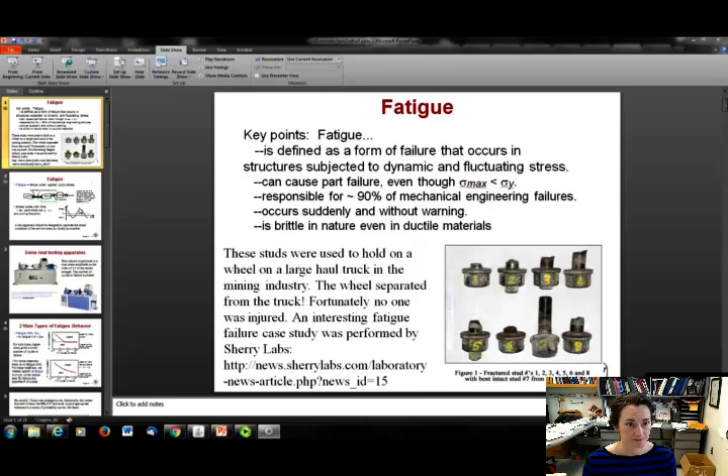Now, you can simulate fatigue. Of course, if you know that your part is going to be subjected to fatigue, you would like to test the part and see how it's going to perform in service. And so they've designed many machines, fatigue testing apparatuses that can do this for you.

So a schematic of it is shown here. Basically, you have something that flexes the part back and forth and rotates the part through so that it gets flexed in multiple directions. And then it can do that for as many cycles as you like.

Basically, what they do is they subject it to this sort of beautiful sinusoidal stress. Now, in reality, in service, the stress might not be that beautiful and sinusoidal. It might be much more erratic, but machines do the best they can to simulate that stress.

And what they do is they set this stress parameter here. You can change the mean or average stress, and you can change the stress amplitude. You can change the frequency of the oscillations of the stress, and then you just run it to failure. You wait until the part breaks, and you do that for multiple scenarios on the same type of material so that you can get a feel for how that part will perform under a cyclic applied stress.

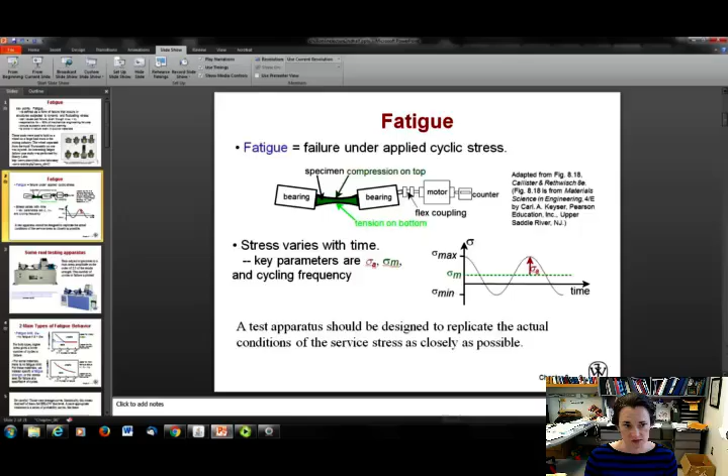Of course, you want to replicate the actual conditions of service as closely as possible. Here's some images of some testing apparatus that I found online. Basically, the tests will subject a specimen to a stress amplitude that's on the order of two-thirds of the tensile strength, and then what you do is plot the number of cycles to failure versus the stress.

So here's a couple images of those plots. Here, what's plotted in this case is the stress amplitude. You could change it to the mean stress. You could plot whatever parameter you're interested in regarding the stress on the y-axis. And then on the x-axis, you plot n, which is the number of cycles to failure. This is a logarithmic plot with cycles to failure here.

There's basically two types of fatigue behavior that are seen commonly. One type of fatigue behavior is seen for many different steels—that's the one up here at top with this curve. And then on the bottom curve, you see that for a lot of non-ferrous alloys, and we'll talk about those two scenarios.

For these two different scenarios, higher stress is actually going to give a lower number of cycles to failure. That's why the curve goes up as it approaches low numbers, with your stress amplitude. So the part will fail at a lower number of cycles if you subject it to a higher stress.

Not really surprising. Now, with some steels, as long as you keep the stress below what's termed a safe level, the part won't fail on you. So you have to keep it at a low stress. You're in this safe region because the curve will flatten out as it approaches high numbers of cycles. As long as you keep it below that stress amplitude, the part will perform well. That's a steel type behavior.

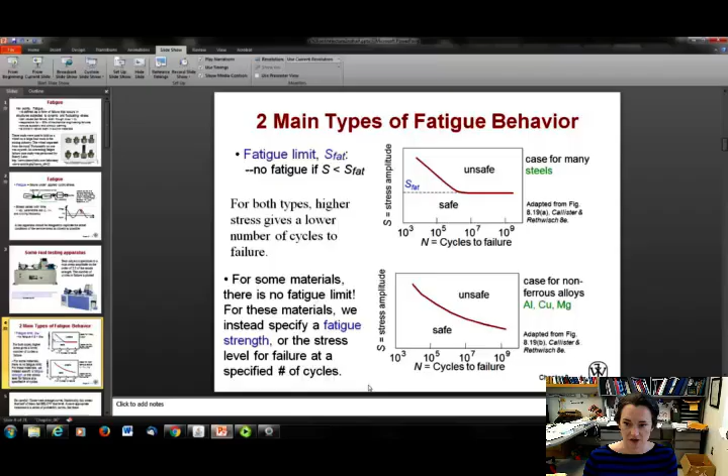Now you have to be really careful because those curves I showed were actually average curves. Statistically, that means half of them are going to fail below that level. If that's your mean curve, then half of them are going to fail below that.

A more appropriate treatment might be a series of probability curves. If you go on and become a materials engineer, a materials scientist, I would hope you would do this sort of thing and plot a parameter, then stay in the safe limit even for the low probabilities of failure.

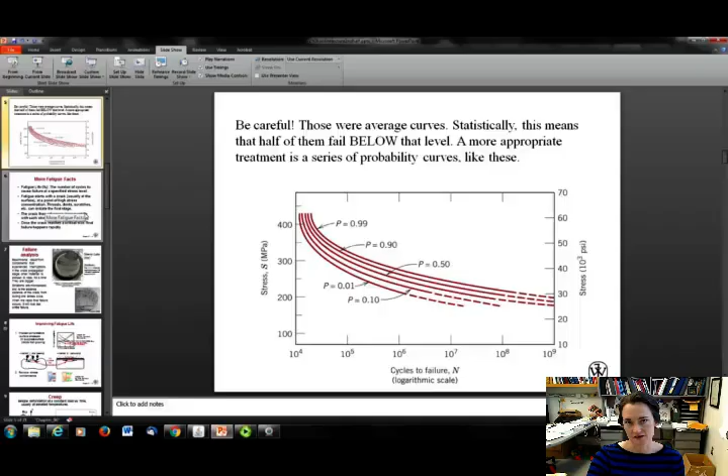Now, another important parameter that sometimes gets cited is the fatigue life. The fatigue life is the number of cycles to cause failure at a specified stress level. So you specify the stress level, and then you see how long it is until the person has to change that part out, basically.

Fatigue, when it starts, happens in 3 stages. It usually starts off with a crack or a scratch or something like that. So you have a defect in your surface. It could be the threading on your bolt, a dent in your surface, a scratch, a rusted spot, whatever. Then at that defect, a crack will form, and this usually happens at the surface.

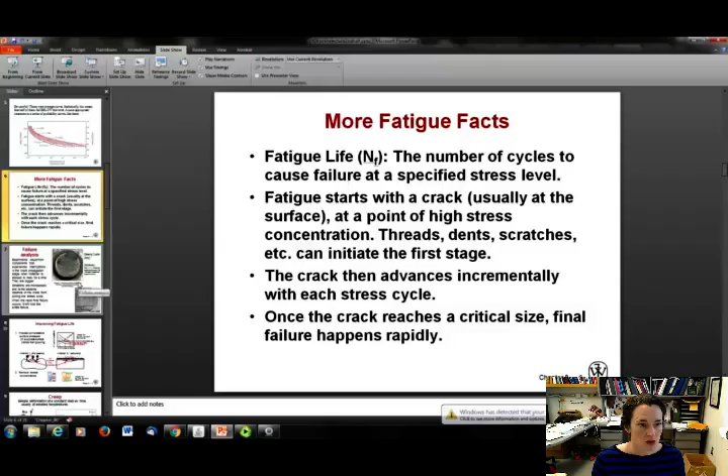In the second stage, that crack that's formed will advance incrementally with each stress cycle. Every stress cycle, the crack will move a little further, and a little further. When it's reached a certain critical size, the final failure will happen. That's why we say fatigue failure happens without warning, because if you don't know the crack is there, all of a sudden the part will just fail one day and you've got what looks like a brittle fracture failure.

Now, there are people that do these analyses, like the example we showed earlier, and you can look at the fracture surface and see what's going on. There are certain characteristic things they see in these fatigue parts. First, this is an image of one of those bolts that failed that we showed on the very first slide. It's exhibiting something called a beach mark, also sometimes called growth rings or clamshells. It shows this kind of characteristic layering look, like a tree ring or growth ring.

What happens is the crack is advancing while being subjected to stress, but then the part is taken out of service for some time. Maybe everybody goes home for the night, or maybe the part is on a bridge and there's not too many cars on the bridge that late at night. So it's allowed to relax a little bit, then subjected to the stress again, relax, subjected, relax, and this forms a very distinct looking pattern that people have learned to recognize as a sign of fatigue failure.

They're bigger, visible to the naked eye or with just a simple handheld lens. Now if you look at the part under an electron microscope or a high power microscope, you can see what are known as striations inside these beach marks. The striations are microscopic, and they show the advance of the crack front during just one stress cycle, looking like little ripples.

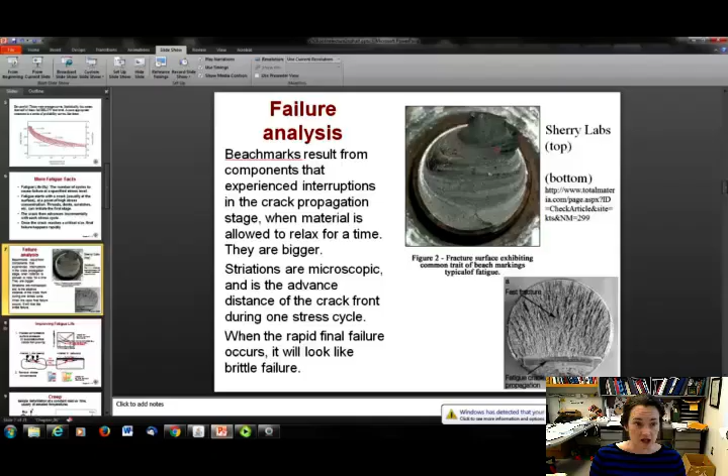Now, since most of these defects, the cracks, start at the surface, anything that you can do to strengthen the surface is a good thing. So you can do what's called shot peening, which introduces defects at the surface, hardening, strain hardening. You can carburize it, you can alloy it. Alloying will strengthen a part. And you can also remove those stress concentrators.

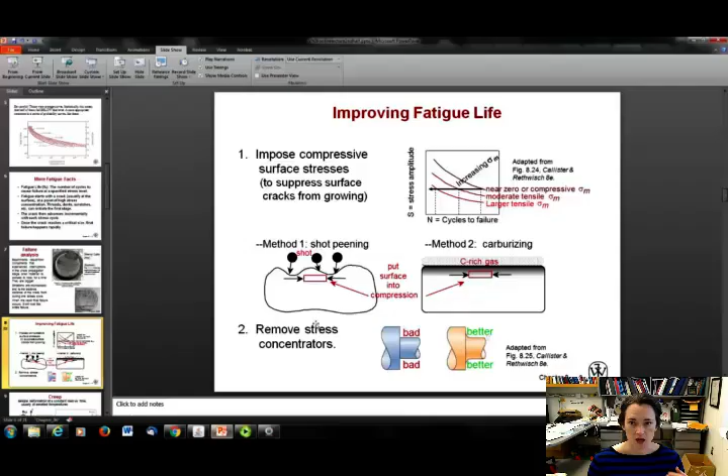If you have very small radii of curvature, very sharp corners, or anything like that on your part, then your fatigue will want to set in there. So anything that you can do to make the radius of curvature larger would be good. That's also a good thing to think about.

Okay, so that's fatigue and fatigue life. Now let's talk about creep. There's some parts that aren't necessarily subjected to cyclic loads with a stress that varies in time, but there may be a load-bearing type thing. They're supposed to hold a long tensile stress for a long time, and it's not cyclic in nature, just really heavy all the time, for example. Those parts are subjected to creep.

Oftentimes these parts, say for example if it's in a jet engine or something like that, this also happens at elevated temperatures. The part gets really hot in service. So if you have kind of a constant load over time at an elevated temperature, your part is subjected to creep. Okay, so there's 3 stages of creep.

First of all, when you first place the part in service, the very first few days, this is called primary creep. In that, you have an instantaneous deformation. The part will deform the instant that you put it in service by some amount. It'll get all stretched out. And then the slope here will decrease with time until it reaches the steady state, which is the secondary part.

They believe that this decrease in the slope with time of the strain on the part, which is called the creep strain, is due to strain hardening. So the part, the metal, is actually getting tougher in service. Then it reaches a plateau where the strain hardening is actually battling with the recovery phase for the part, because remember the part is being subjected to heat. And then you have what looks pretty much like a flat, straight slope there. That stage is called secondary creep.

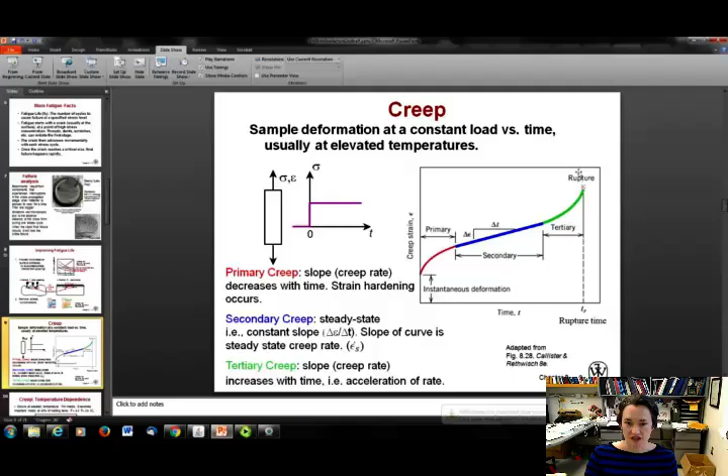And then finally, it exits the secondary creep and enters the tertiary creep phase, and then the slope actually increases with time until the part finally ruptures. So you want to stay away from that.

Creep, as you can imagine, has a temperature dependence. The hotter your part, the more your creep strain rate will be. The faster the creep will occur. For metals, it becomes important mostly at greater than 40% of the melting temperature. Then it really takes off. So that's something to bear in mind.

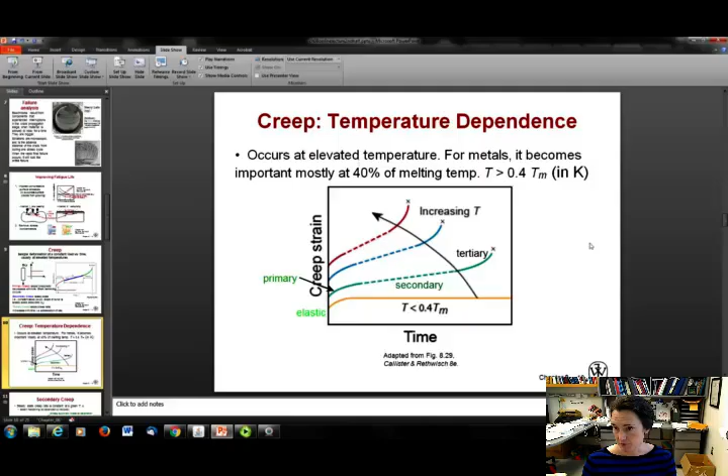Okay, so let's talk more about that secondary creep regime. Your steady state creep rate is actually constant at a given temperature and stress. You're at that point where the strain hardening is balanced by recovery and you've got that constant looking slope. Given a temperature, your exponential dependence of temperature is here, so you have the activation energy for the creep, and as long as that temperature is held constant, this exponential term here is constant. It's e to the minus q over RT, and that's the activation energy for the creep, that q, and then there's your temperature.

Now, your strain rate is the strain, which remember is the change in length over the length.

So that's the definition of strain. And a strain rate is how much strain happens per unit time. So that's your strain rate, epsilon dot.

Then you have a material constant in here, which is going to be a bit different depending on what your material is. And then you have your applied stress raised to the power of n, your stress exponent. Now if you do a log plot of these things, they look like straight lines.

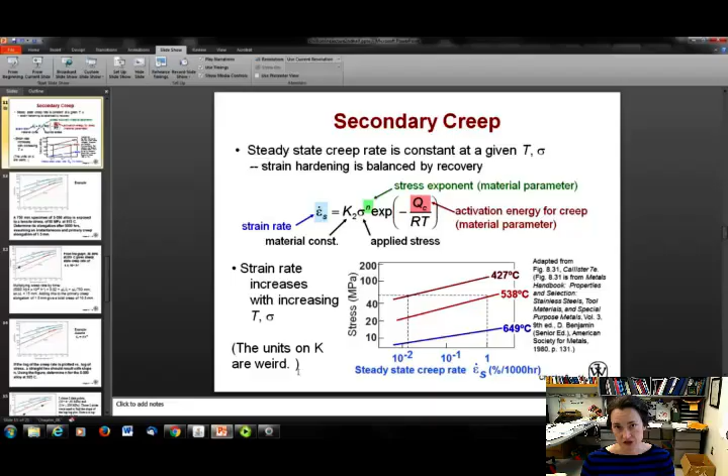So your strain rate increases with increasing temperature and increasing stress. Don't worry too much about the units on K, they're really strange, but it's basically just a fit parameter that you would get from the fit for a particular material.

Okay, so let me do an example problem for you so that you can see what some of these creep problems look like. I actually have about 3 examples here to go through.

So this is a steel alloy, S590 alloy, and it's 750 millimeters long initially, and it's exposed to a tensile stress of 80 megapascals at 815 degrees Celsius. Using these plots, we're going to determine the elongation after 5,000 hours, assuming that the instantaneous and primary creep elongation is 1.5 millimeters.

So these curves here show the secondary creep behavior, and the instantaneous and primary creep elongation are given to you as 1.5 millimeters. So you just need to figure out the secondary part and add it onto the primary.

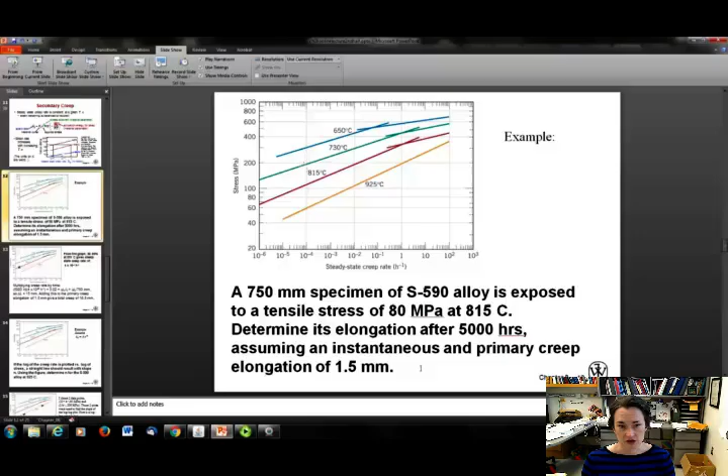So what we can do is we know that the part was subjected to 80 megapascals at 815 C. So I can look at my plot here and read off for 80 megapascals from the 815 C curve, which is that red curve here, and see what the creep rate is at that value.

So reading that off the plot, I get 4 times 10 to the minus 6 inverse hours. Again, the units are a little strange on these things, just go with it. So here's my steady state creep rate.

That's my epsilon dot. And then what I can do is it asks me for 5,000 hours, so I can multiply my creep rate by my time. So I have 5,000 times 4 times 10 to the minus 6, and I get 0.02. So that's my creep.

So that'll give me my creep. If I multiply my creep rate by my time, I get my creep. And that's equal to, remember, the strain, which is the change in length over the initial length of 750 millimeters. So that means I can solve for my elongation, and it's 15 millimeters.

And that's for my secondary stage. If I add that to the primary creep, I get 16.5 millimeters of elongation of that part. Hopefully that helps.

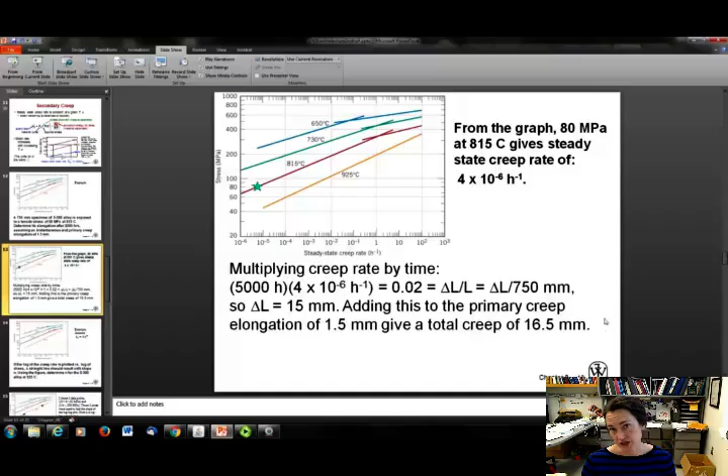Okay, here's another question, all right? These are all taken from your book. If the log of the creep rate is plotted versus the log of the stress, as it was previously, a straight line should result with a slope of n.

So using the figure, determine n for the S590 alloy at 925 degrees Celsius, shown here in the orange curve. We're assuming that the temperature is held constant, so that exponential term e to the minus q over RT is a constant value.

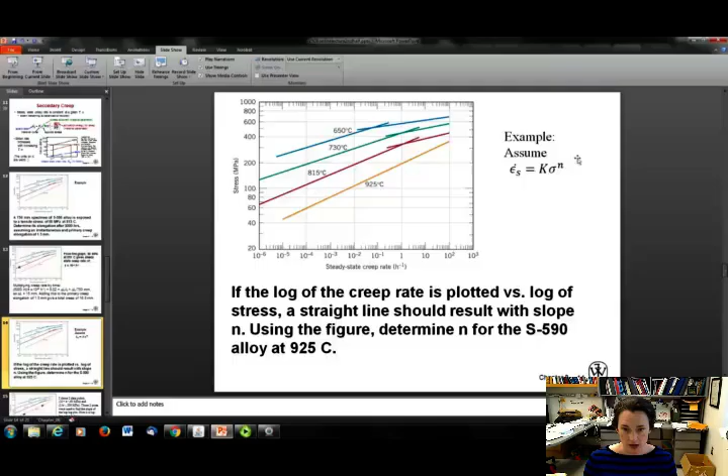So for this curve, it's just shown here, and it's some value. And we're assuming here that epsilon dot is equal to k sigma to the n. So what I'm going to do is choose 2 data points off this line and figure out my slope, and from that I can figure out what my value of n is.

So the 2 data points that I chose are the ones that kind of crossed over one of these grid lines, two cross grid lines here. And the two data points I chose were 10 to the minus 4 and 60 megapascals - it looked like it intersected there - and 1 inverse hour and 200 megapascals. So I chose those two data points.

Now if you look at what the log-log plot would be, if I take the log of both sides of this equation, I get log of my creep rate equals log of k plus n log sigma. And then what's plotted here, though, is the stress on the y-axis. So my slope then would not be n, it would be 1 over n.

I rearranged my equation here to show that. So I have 1 over n log of my creep rate minus 1 over n log of k. This just becomes my intercept, so it's unimportant to me for my slope calculation. And then that's equal to the log of sigma.

So if I want to solve for just my slope, that'll give me my value of 1 over n. I plug in for my two data points: my change in y would be log of 200 minus log of 60, and the change in x would be log of 1 minus log of 10 to the minus 4. If it's log base 10, the log of 1 is just 0, and the log of 10 to the minus 4 is minus 4. When I do that, I get 0.1046, which equals 1 over n. Solving for n, I get 9.6, so basically 10.

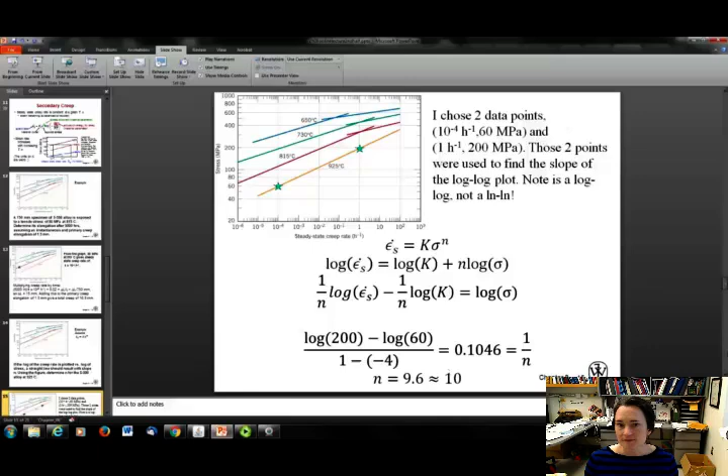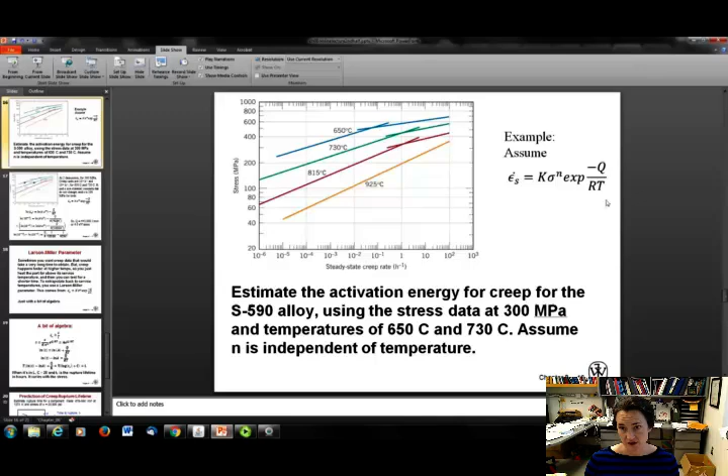Next question: estimate the activation energy for creep for the S590 alloy using the stress data at 300 megapascals and temperatures of 650 C and 730 C. Assume N is independent of temperature. So in my example here, I've got my equation for my creep rate: epsilon dot equals K sigma to the N, e to the minus Q over RT. That's my assumption.

Again, I'm going to use my two data points, here for the 300 megapascal data. Looking at the intersection of the data, I get creep rates of 10 to the minus 4 inverse hours and 10 to the minus 2 inverse hours for 650 and 730 C, which were the temperatures cited. Now K and N are material constants that don't change, since all these curves are for the same material, the S590 alloy, so those can be assumed to be the same. And sigma is given as 300 megapascals for both.

So from this I've got basically two equations and two unknowns. I know my values of creep rate, I know my values of temperature. I don't know the K sigma to the N bits, but since I have two equations, I can subtract them and that constant drops out. So I end up with the natural log of 10 to the minus 4 minus the natural log of 10 to the minus 2 equals Q over R times 1 over 1003 minus 1 over 923. I solve this equation and get my Q, plugging in the known gas constant R, 8.314 joules per mole Kelvin.

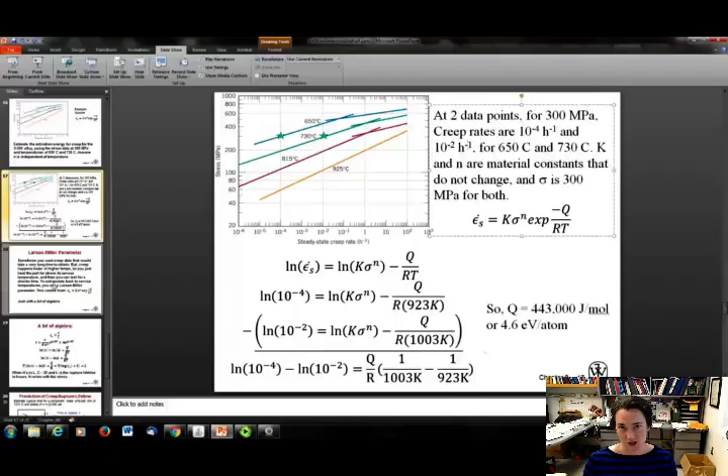Now sometimes you want creep data, but it would take a really long time to obtain because the expected life of the part is years, for example. But you know creep happens faster at higher temperatures. So if you want a test that takes a reasonable amount of time, you heat the part up to a temperature far above its service temperature, and then extrapolate back for the temperatures it would actually encounter in service to figure it out that way. So you do the test at a higher temperature and figure out what would happen at a normal temperature. We can use what are called Larson-Miller parameters and Larson-Miller plots to figure this out.

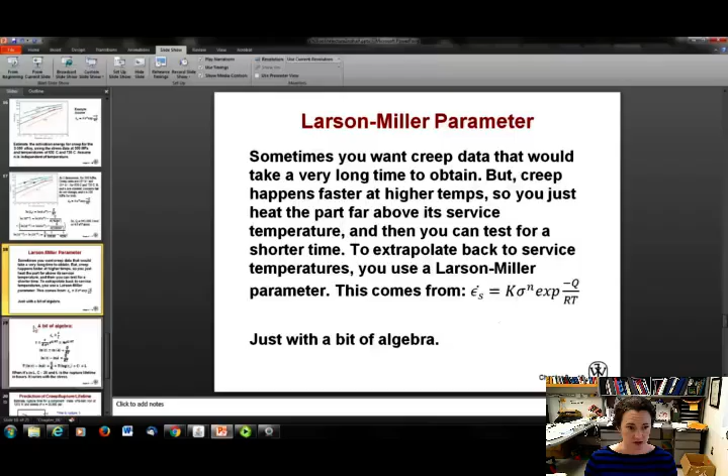Your Larson-Miller parameter just comes from the same equation we've been using: creep rate equals K sigma to the N, e to the minus Q over RT, and you apply a bit of algebra to it. If you remember that your creep rate is just your creep strain over time t, you can rewrite the equation so that time equals your strain over K, over sigma to the n, times e to the Q over RT. Basically I flipped the equation and multiplied and divided through by my strain. Now I'm taking all this stuff out front because I don't care too much about it - I'm just going to call it 'a' for some constant.

And then I take the natural log of both sides, and I get log of natural log of t equals natural log of a plus q over rt. Move things over to the other side, subtract it off, multiply through by my temperature, and then I get this relationship: my temperature times the natural log of my time minus the natural log of my constant. Now this is equal to q over r.

Now we can switch this over to a log-base-10 plot so that it more closely matches your book. All that would do is introduce a proportionality constant that we don't care too much about, and maybe change what this constant is here inside. That's all that would do. And then that is our Larson-Miller parameter L.

So our Larson-Miller parameter L is the temperature times the log of the time to rupture plus some constant C. Your book says this constant C varies a bit, but it's about 20. I'm sure if you went through and did the math, you could figure out why it's about 20. The rupture lifetime is usually cited in hours, and it varies with the stress.

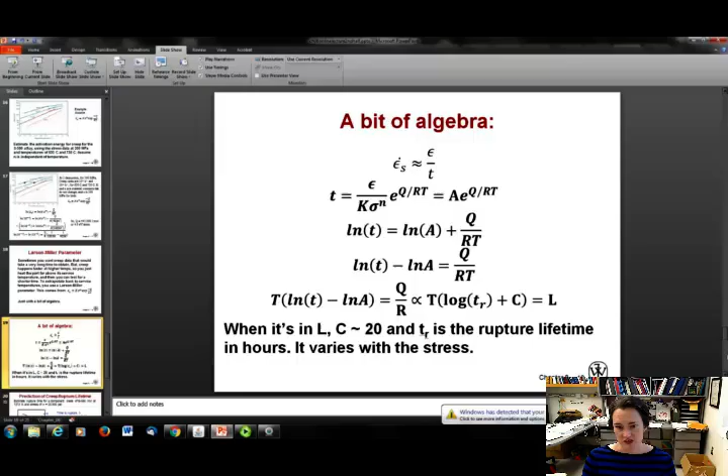What you can do is use this to estimate rupture times. You gather the data at a high temperature yourself, and then use your Larson-Miller parameter, which should be equal to a constant — that constant Q over R should be equal to that value — and then you can figure out what it is at the temperature you're interested in.

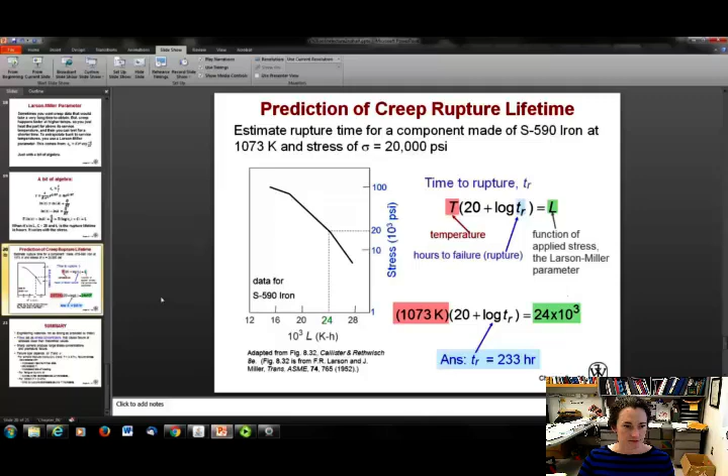That finishes off what I wanted to say about Chapter 8. In summary, engineering materials are not as strong as predicted by the theory you might get from a tensile stress calculation. They can fail at stresses much lower than their yield stress or tensile stress.

The reason for that is, first of all, because materials are flawed. They have a lot of flaws in them, and those flaws — scratches, dings, dents, or even voids inside the part that might not be visible to the naked eye — act as stress concentrators. Those stress concentrators can cause failure at stresses much lower than the theoretical values.

If you have a sharp corner in your part, you definitely want to get rid of that. You don't want that included in your design, because that's a large stress concentration that can contribute to premature failure, which is totally undesirable.

Your failure type is going to depend upon your temperature and your stress. If you have a simple fracture — non-cyclic stress and relatively low temperatures — then your failure stress is going to decrease with increased maximum flaw size, decreased temperature, and increased rate of loading.

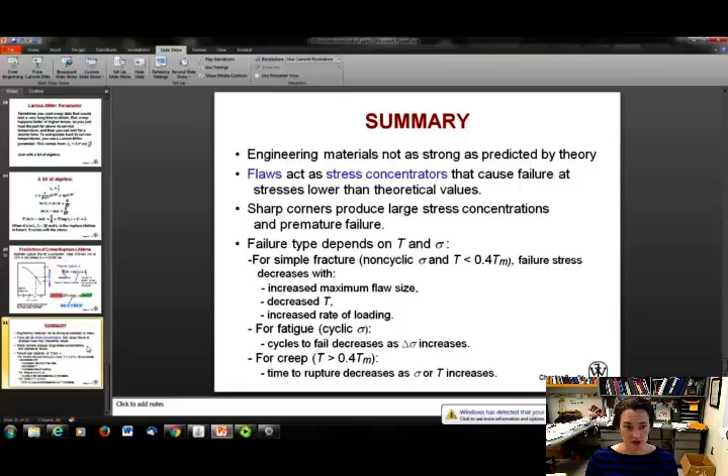If you have a fatigue situation with a cyclic stress, then the cycles to fail will decrease as your amplitude of stress increases. And for creep, the time to rupture will decrease as your stress or your temperature increases. So that's kind of a summary. All right, see you in class.